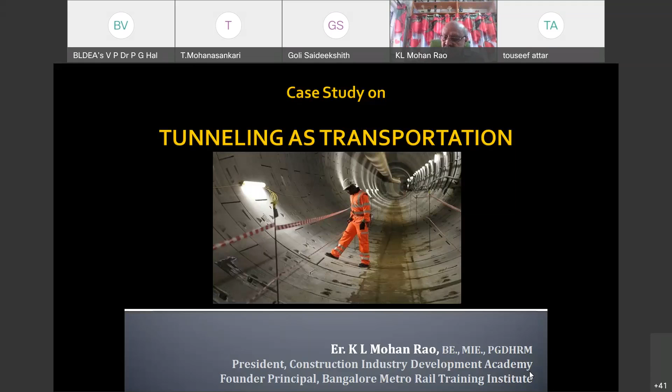So the whole system we are going to talk about: why tunneling, how tunneling is done, advantages and disadvantages, and also a case study of the Bangalore Metro Rail Corporation, which did its underground tunneling in the heaviest density of Bangalore, the old city of Bangalore, where all old structures are there. It shakes on its own, but we did the drilling about 60 feet below the city market and Chickpet area, and we faced a lot of challenges. So this is how we will be covering this area.

So what is tunnel? Tunnel is an underground passage used for transportation. It could be used for carrying freights and passengers, water, sewage, etc. Tunnels are more economical than the open cut beyond certain depths. Open cut means we are opening it up. Calcutta Metro did the open cut system, and it had terrible problems because in a very high density area they had to cut it open, and there were so many other problems like sewage, telephone line and water line, everything to be corrected. It took them 10 years and above.

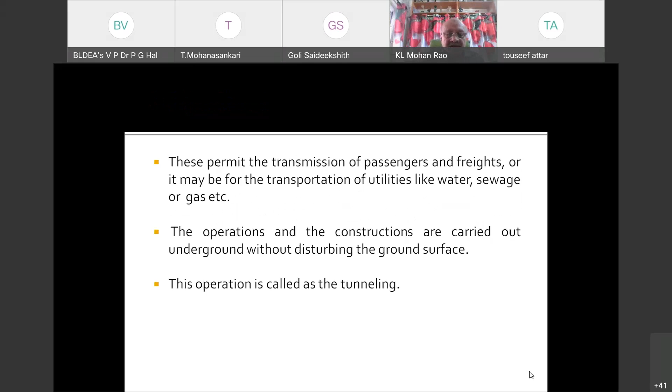So tunnels avoid disturbing and interfering with the surface life and the traffic during constructions. They permit the transmission of passengers, freight, and it may be a transportation of utilities like water, sewage, and gas. The operation and the constructions are carried out underground without disturbing the ground surface. That is why it is called as tunneling. Tunnels are underground construction used for transportation. The features, advantages, disadvantages, and methods of tunneling have been discussed in this presentation.

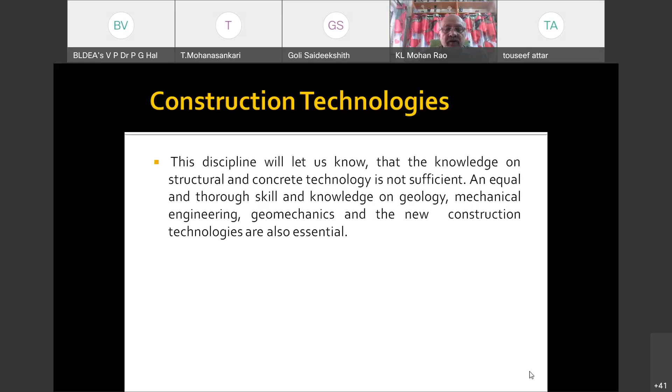The tunnel engineering is one of the most interesting disciplines in engineering. The work is complex and difficult throughout its course, even though it is interesting. Tunnel is defined as an underground passage that can be used for transportation purpose. This discipline will let us know that knowledge of structural and concrete engineering is not enough, and thorough knowledge of geology, mechanical engineering, geomechanics, and new construction technologies is also essential. So those people who are thinking civil engineering is only concreting, no, you have to have the additional knowledge about the other systems also.

The two main factors that help in the efficient route of tunnel are the alignment restraints and the environment consideration. The underground, as we know, is heterogeneous in nature. A proper inspection of the nature of soil, rock, and water table level, and all alignment restraints have to be made before fixing the route. So they have to make a real survey of it and see. Most of the time, the survey is done along the big roads of the place. The site chosen for tunneling is such that no inconvenience and difficulty is caused to the environment in the area, including those people who are living in that area.

Tunnel in loose rock and soft soil is liable to disintegrate, and therefore a lining is provided to strengthen the sides and the roof so that it prevents collapsing. So as the tunneling goes on, the TBM, that is the tunnel boring machine, will go on laying the lining. That means as soon as it digs about 3 meters, immediately from behind, we are bringing in the already made segments, and they are placed so that there is no collapse or water leakage inside the tunnel.

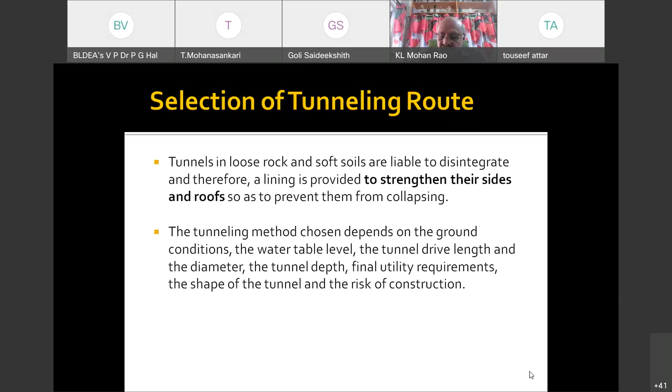The tunnel method chosen depends on the ground condition, the water level, the tunnel drive length and the diameter, the tunnel depth, final utility requirement, the shape of the tunnel, and the risk of construction. Surface and air interference is restricted for tunnels. Provision for tunnel is easy gradient, which helps in reducing the cost of hauling. So if you are doing open cut, you will be cutting and you will be creating a lot of muck, and it has to be taken out and dumped somewhere else.

For the transportation of public utilities, tunnel methods have a remarkable advantage compared to the bridge. The danger of open cut to the nearby structure is solved by tunneling systems. When we are cutting it, you must have seen on the roads, these other methods are being used.

We are removing the muck, and then when we are removing, sometimes the neighboring structures will also get damaged, and a lot of precautions for that have to be taken.

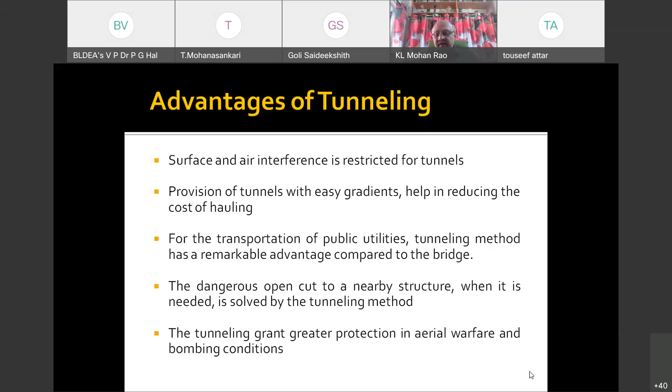Tunnels grant greater protection in aerial warfare and bombing conditions. You remember the Iraq war, when these people were just going inside the tunnels and staying there. Even if the Americans were bombarding them, everything was up there, because these people were nearly 60 to 100 feet below the ground and they were well protected.

The tunneling method has certain disadvantages, which are due to the complexity and difficulty. Some of them: the initial investment cost for commencing the tunnel is high compared to the open cut method. Initial investment, because we have to go down, and the machinery has to be brought in. In Bangalore Metro, we had imported machines from Japan. We had brought it from Korea. We had brought it from China.

Only a highly skilled and experienced design and engineering team will work best in these operations. In Bangalore, those people who were operating the TBM were not allowing our engineers into the cabin where these systems were going on, because they felt that Indians can learn it very fast and may replace them. So it is a very difficult situation when we have to coordinate with these Chinese. They were very difficult. They never allowed us to go inside to see what is happening.

And they are very well experienced. Today this is an opportunity for all the young engineers who are coming out in the future to think of tunneling as their alternative, and it is a highly paid job. So if you can start concentrating on how to get into that field, I think it is better now. Those who are in the third and fourth year, please concentrate on this line as an alternative source.

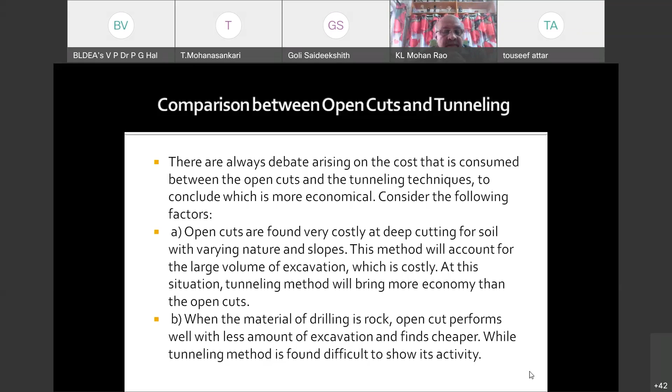When the material of drilling is rock, open cut performs well with less excavation and is found cheaper. So if you have a very big rock there and you are cutting it off, the open cut method is cheaper, while the tunneling method is found difficult.

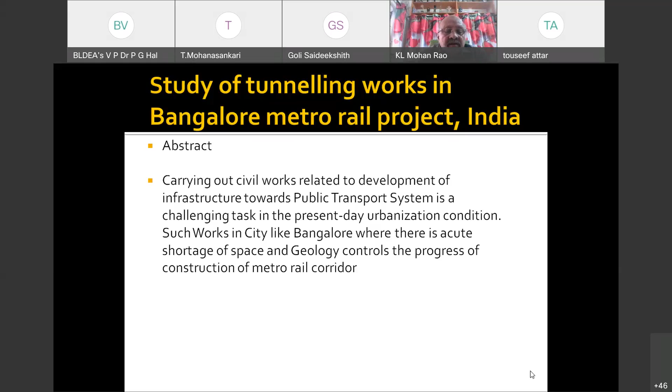So, what we have done in Bangalore Metro, I'm just giving you a case study. Carrying out civil works related to the development of infrastructure for the public transport system is a challenging task in present-day urbanization conditions, such as work in the city of Bangalore, where there is an acute shortage of space and geology controls the progress of construction of the metro rail corridor.

BMRC had taken responsibility for implementing the Bangalore Metro Rail project and faced several difficulties in implementing the first phase of the project. Bangalore, as you know, is a plateau, and the strata is not a continuous one. And we faced a lot of problems. One such challenge was construction of the tunnel and underground stations. For an underground station, we have to really go deep, nearly about 60 or 80 feet.

Tunneling in mixed strata below the major roads, and old buildings influenced the process. The place where we had to go underground was the Chickpet area and the market area, where old constructions are there.

Many old structures are there. People are residing there for more than 150 years. Maybe the buildings are also as old as that. And the other thing was there was no planning at all. One fellow built next to the other; I think other buildings are supporting these buildings. Because of the support from all three sides, these buildings have survived all these things.

So, one such challenge is construction of tunnels and underground stations. The tunnel is in mixed strata below the major roads, and the old buildings are influenced under the process. When we were tunneling in Chickpet and the market area, many times we had to evacuate people from the place, because sensors were put in all these old buildings to monitor when the rotation of the TBM was done.

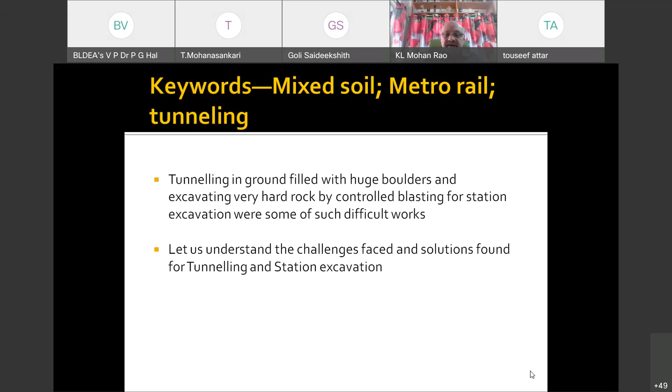Many a time, in spite of all the safety precautions, the rocks used to come and fall into the Central College. So this is the challenge when we are blasting for excavation. Let us understand the challenges faced and the solutions found in tunneling and station excavation.

In modern India, a number of tunnels were constructed in the 750 kilometer long Konkan Railway, which was constructed between 1990 and 1998. Konkan Railway has 93 tunnels. All of them were constructed by conventional methods except one tunnel in Honavar, Uttara Kannada district, Karnataka state, which was constructed using an open shield. That means it was ripped open, and things were done there.

Future. Now, in future railways, tunneling is happening. It's a new thing. A Dubai to Mumbai underwater tunnel train, covering a distance of 2,000 kilometers in 3 to 4 hours, also for oil and water transportation. It's in the news. So you have lots of opportunity, because the whole world is now talking about tunnels under the sea.

Mumbai to Ahmedabad is 508 kilometers, and an underwater tunnel of 21 kilometers is planned. Financial assistance is coming from Japan, and the work is in progress. And you will get the Kolkata underwater train for a distance of 17 kilometers at a depth of 30 meters.

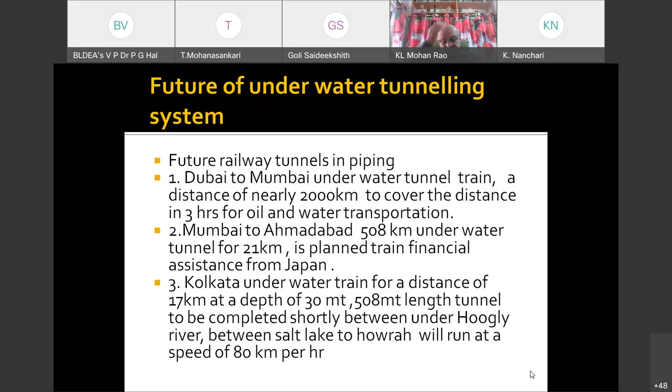A 508 meter length tunnel under the Hooghly River will be completed shortly, from Salt Lake to Howrah. This will run at a speed of 80 kilometers per hour. So that will be the first underwater train, in Kolkata. So you don't have to visit foreign countries to see marine life; you can see the whole system there.

Open shield refers to the type of tunnel boring machine, TBM as it is called, with which the cutting face of the shield is open, allowing direct access to the soil surface. So tunnel boring machines are put in an open shield. It is cut for nearly about 100 meters, and then this machine is put inside, and the tunnel boring machine is used for open shield methods.

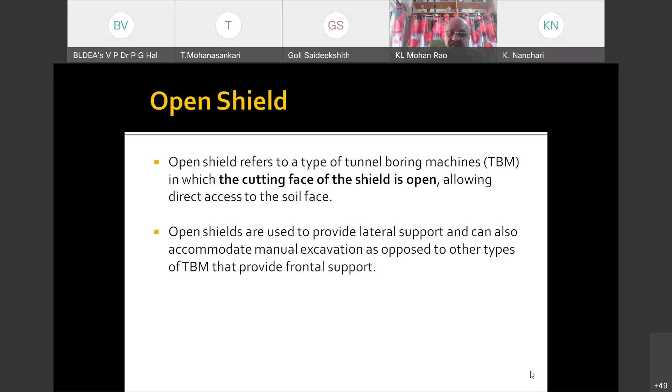Open shields are used to provide lateral support and can also accommodate manual excavation, as opposed to other types of TBM which provide frontal support. So the TBM is lowered into the place where tunneling has to be done, and then it is supported from all round, and it also has to be pushed with frontal support.

So this is the TBM, the tunnel boring machine. You can see it is 300 meters. It's a complete factory inside the tunnel. 300 meters, and so many people working at different stages.

The first thing here you can see is a cutter. Inside, this is a place where all the engineers are sitting, and then this is a place where the surface which is ground is taken off, all the excavation is taken off and then pushed outside the tunnel, which is far away. So this is the TBM, 300 meters long and maybe about 30 meters in diameter.

Tunnel boring machines were first used extensively in India by Delhi Metro Phase 1, subsequently Bangalore Metro and many other metros, as well as in other works related to irrigation, hydropower, disposal, sanitary and drinking water.

Tunneling is being used extensively now. Tunnel boring machine is a very safe tunneling method, which has brought drastic improvement in tunneling works. Earlier, machines were of open type wherein shields were used only to support against soil collapse.

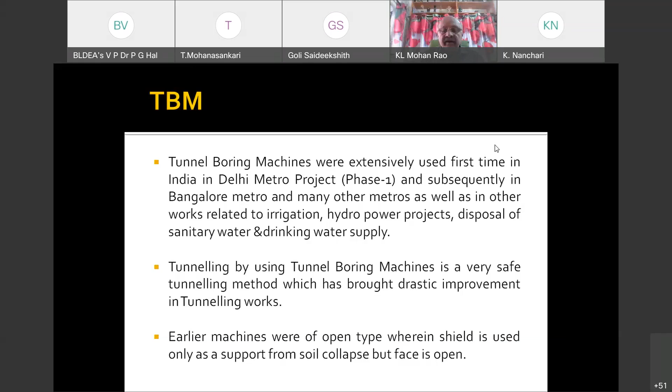A tunneling shield is a protective structure used during the excavation of large man-made tunnels. So you have seen the figure, we have shown you what it is. When excavating through ground that is soft, liquid, or otherwise unstable, there is a potential health and safety hazard for the workers and the project itself.

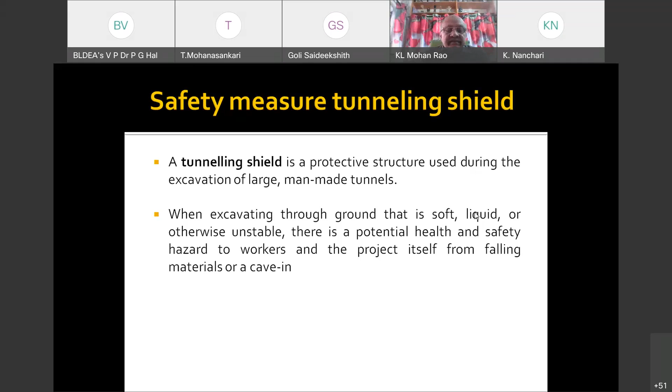This protects from falling materials and caving in. So I have explained to you why this shaft is lined up. Excavation in this type takes place with the help of conventional machines like excavators, so excavators will be used and the material will be removed.

Pressure on the face of the tunnel cannot be increased in open type of machine. If you are using an open type of machine and then if you increase the pressure of the excavator, there is a chance of damaging the structures which are along the tunnel.

In rocky strata which does not need lining as support, if it is a complete rocky mountain, if we are going to open up, then we do not need any support. You can remember that in Jammu we had opened a tunnel about, I'm not very sure, about 8 to 10 kilometers, which was opened by the road tunneling people, and it is connecting Jammu directly to Leh Ladakh, and it has saved a lot of time. It was completely done under the hillock, and it is completely rock only.

So in many places we do not need any shield at all. That is how no support was required there. But drilling was a big challenge, and the open type machine called a cutter head is used, such machines will not have a shield.

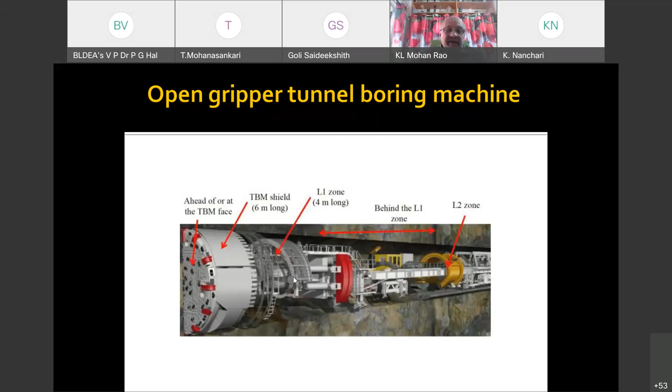And then there is a place, the L1 zone. So all the muck which is collected gets collected here, and then from this it comes here, and then it gets transported through, I think, a conveyor belt. It gets transported outside, and also the lining for the surface is already readily kept ready there, and it gets fixed up automatically. There is a very big slide I'll be showing where the whole operation is explained.

Earth pressure balancing machine. Earth pressure balance is a mechanized tunneling method in which the excavated material is used to support the tunnel face. It is plasticized using foam, slurry, and other additives to make it transportable and impermeable. So when this material is used, sometimes we use it for plasticizing, and we add some more additives, and then it can be used for the lining also.

Slurry machine. Thin slurry is a thin, sloppy, wet mixture of liquid and solid components. Sludge and slurry is the byproduct of industrial refining and wastewater treatment processes, depending on the industry.

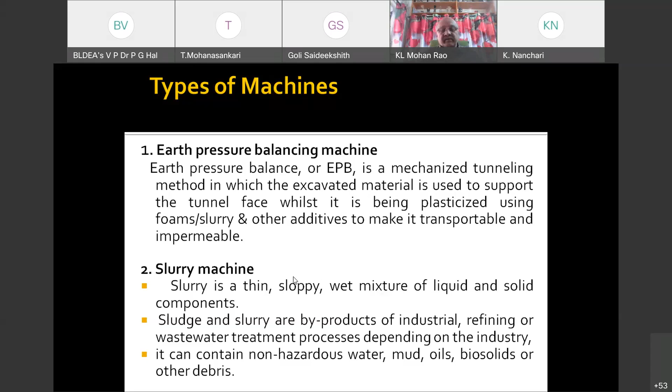It contains non-hazardous water, mud, oil, biosolid and other debris. So this slurry, what is removed, it is taken to the tunnel.

The place where the tunnel starts, the material is recycled. The rock debris from the tunneling is usable for other things, most commonly as concrete aggregate or as base for the road.

So in Bangalore near Sangam, we had a recycling system there. Crushers were there where all the rocky material which came out by the conveyors were brought to the crushers. It was sorted out, crushed, and used for concreting.

Then big rocks were used for laying of roads. Trucks used to be waiting, and then it was taken away. So no material was wasted.

A lot of planning was done so that the material is not dumped at any place making another mountain. It was shifted off and used as concrete aggregate, and also for road filling and road building.

Crushers and screeners normally used in quarries are stationed at the tunnel site for the purpose of crushing and screening the rock debris for further use. Excavated material is transported from the tunnel face to outside the shaft as waste slurry.

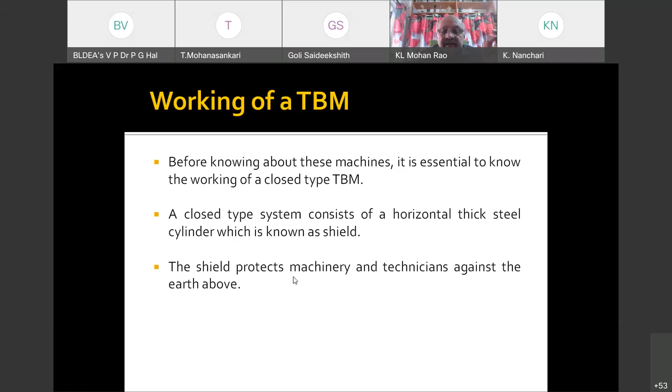The cutter head, where the cutting tools are placed, will be at one end of the shield towards the tunnel face. So you had seen the cutters there. The cutter head is there, lots of cutters are put there, and it goes where it faces the tunnel face.

Cutter head is a heavy set part of the TBM. Cutting disc and scrapers are placed in the cutter head. So you have got the cutting tool, and also there is a scraper.

If there is loose soil, the scraper will go on scraping it. At the same time, the cutting tool will go on drilling and removing all the rocks there.

Design of cutter head is mainly based on the type of earth to be excavated by the machine. So when we are doing the soil investigation, we know what type of soil we will be encountering, and based on that, the design of the cutter head is done.

A machine to work in soil will not have cutter discs, it will have only scrapers. So if it is loose soil, it is only soil there.

In Bangalore, the plateau, we had lots of mixture. In one strata, when digging, we have got sand and silt. We have also got a mixture of sand and rock, and then we had hard rock. So like this, it was not predicted.

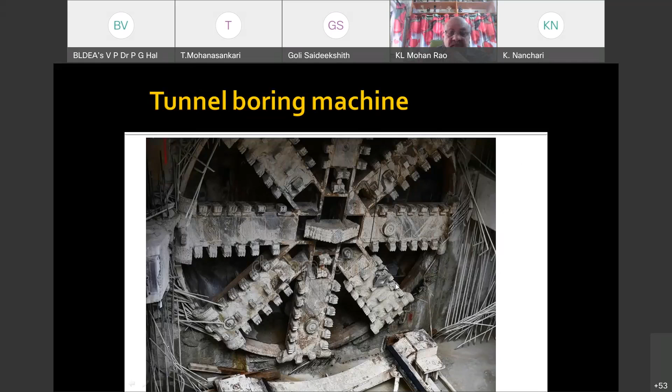So lots of challenges will come in the tunnel boring machine, which will be illustrated now. A machine to work in rocky strata will have cutter discs mounted on the cutter head. There will be a suitable number of drive motors for rotating the cutter head, because it requires lots of pressure.

So there will be a segment erector which is used to place the tunnel lining. In Bangalore Metro, we had about 6 segments with a small T there. These 6 segments are placed inside the machine, and as soon as it starts drilling, the segments are pushed inside, and then erected with the machine's help, and whatever gap is between the segment and the shield, I don't know if you are imagining it.

So you are putting a pipe inside, a big pipe going inside, but the pipe is made into 6 different segments, and then it is assembled by the TBM itself, and it has got a T joint, which acts just like a dowel, it goes and sits there and tightly packs into the diameter of the shaft or tunnel. The difference, whatever gap is there, is filled with slurry by this machine itself, so that it becomes solid and no water seepage or material comes out from the shield.

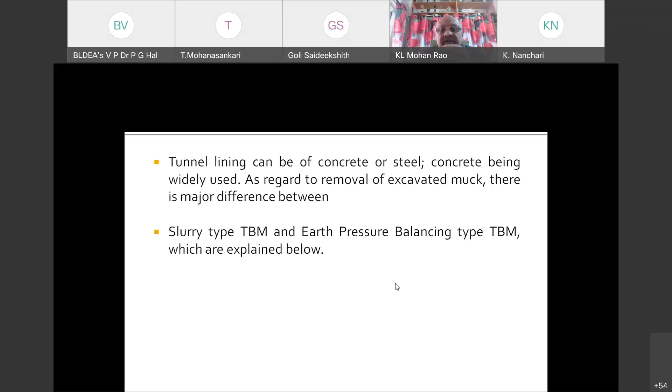As I told you, concrete precast material is used. In Peenya, we had a very big casting yard. Now we are doing a lot of work along Mysore Road and the other periphery road connecting South Bangalore to Bayapanahalli, making a complete circle, and lots of concrete blocks are being made at different sites.

So slurry type of boring machine is a machine where excavation takes place in presence of a liquid. A liquid is poured and pumped inside the tunnel, and the tunnel mud has a specific gravity of 1.12 or 1.2. When the liquid is pushed inside, it can be made using bentonite clay or polymers. The tunnel mud is pumped through the pipe to the excavation chamber.

So we are putting a lot of pressure, and this bentonite clay or polymer is pumped in front of the cutter, and whatever muck is collected while drilling is taken away by conveyor belts. It is taken outside and filtered, then recycled back inside the tunneling process.

Excavation by the TBM happens due to rotation of the cutter's head and forward movement of the shield, helped by thrust jacks. So the rotation is happening by the cutters, and behind there is a thrust mechanism. A very big thrust is given by the thrust jacks, creating pressure, and that is how the cutting goes on.

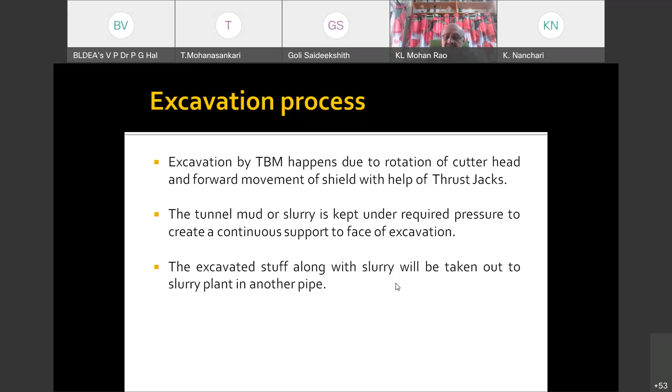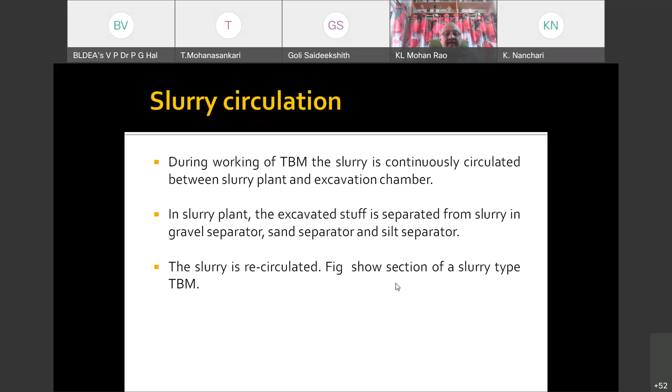The excavated stuff along with the slurry is taken out to the slurry plant in another pipe. During working of the TBM, the slurry is continuously circulated between the slurry plant and excavation chamber. At the slurry plant, the excavated stuff is separated from the slurry in the gravel separator, sand separator, and silt separator. As told before, it goes by conveyor to the slurry plant, gets separated, is reused somewhere else, and the slurry comes back recirculated. The slurry plant is shown here.

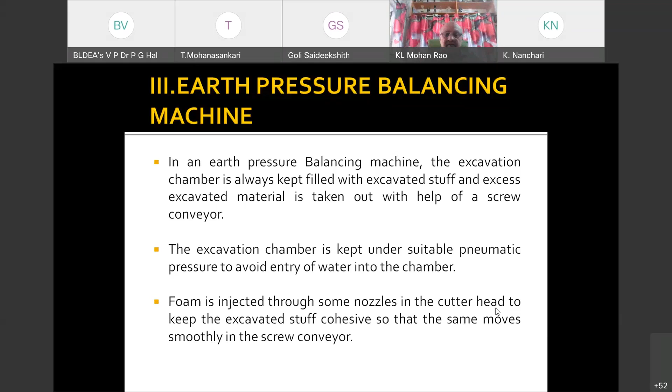Foam is injected through some nozzles in the cutter head to keep the excavated stuff cohesive so that it moves smoothly in the screw conveyor. So whatever excavation is being done, whatever cutting is being done, a foam will be given so that it is uniform and stuck together, and when the conveyor screw moves, it moves behind. So this is the conveyor screw.

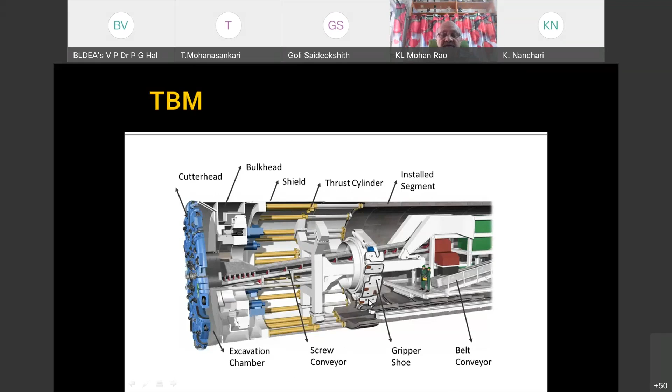So installed segment. This is already installed. You see, as I told you, the segments are brought in 6 different pieces, and they have been installed here. So as the drilling goes on, installation goes on from behind. So excavation chamber is this, screw conveyor is this one, gripper shoes. All the shoes we were talking about, the gripper shoes, are here. Then the belt conveyor which takes the muck behind.

Two types of forces are applied in TBM for excavation. One is to rotate the cutter head, that is the torque, and the other is to push the shield, that is the thrust. A combination of these two forces is used for excavation in rock and soil. Face is kept under pressure. That means beyond the cutter, it has to be kept under pressure to keep the water away from entering the machine. So if there is a pressure in front of the cutter, this water will not flow inside the machine, the chamber where the operations are being done.

If there is a loss of water from the area near the tunnel alignment, water table in the vicinity will be affected, which will cause settlement. So we have to be very careful to see whether there are any tanks or any reservoirs where the tunnel is going, and if there is any leakage, we can have water coming inside the tunnel.

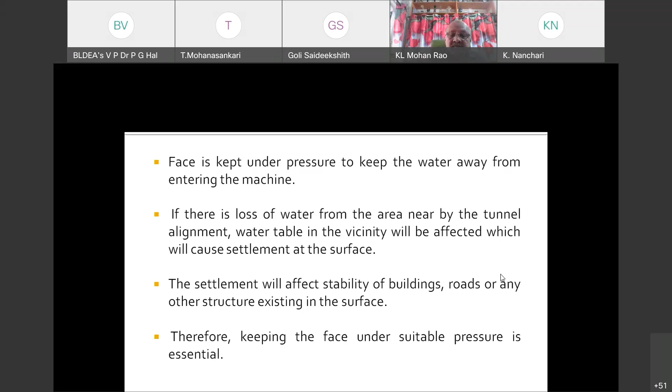If there is a loss of water from the area near the tunnel alignment, water table in the vicinity will be affected, which will cause settlement at the surface. As soon as the water comes out, caving in will start happening, and all the buildings around will be affected. The settlement will affect stability of the buildings, roads, and any other structures existing on the surface. So we have to make sure that the pressure inside the tunnel and outside the tunnel is balanced. Therefore, keeping the face under suitable pressure is very essential.

While excavating the rock, revolution of the cutter head is kept higher. So if there is rock there, the rotation of the cutter will be 4.5 revolutions per minute, and thrust force is kept low. We cannot push by thrust, because there will be rock there. If there is rock, we have to go very slowly. In Bangalore, we did not use this 4.5. I think we were only using 2.5 to 3 revolutions per minute because of the buildings above us.

In case of excavating soil, revolution of the cutter head will be kept low and thrust will be kept high. So if it is only soil, the cutter head speed will be kept low and the thrust is more.

In case of a mixed strata, both the above guidance cannot be met. So we'll have to judge and see whether rock is there, soil is there. Based on the experience of this person, the speed is adjusted.

When the face is partially rock and partially soil, this guidance gets violated with respect to the rock or soil. It is difficult to cut the rock with a lower revolution, and at the same time, soil gets excavated quickly, and the face needs to stand on its own for a longer period, which may cause a collapse of the face.

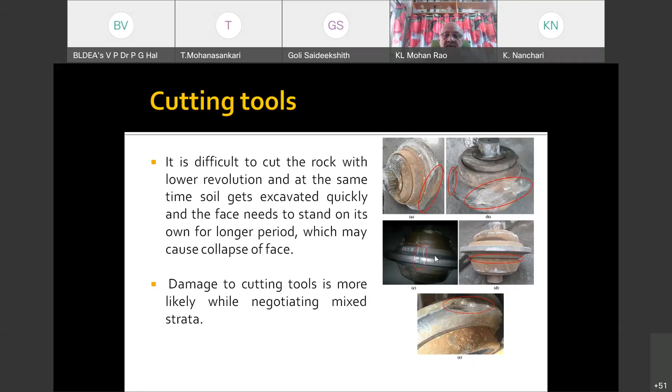Careful movement of the machine, close observation of various parameters like face pressure, advance rate, theoretical and actual excavation quantity, etc., is very essential while mixed face is encountered. So, removing only soil is not so difficult. Removing a rock is not very difficult, but when there is a mix, then a lot of tool damage and interventions will take place.

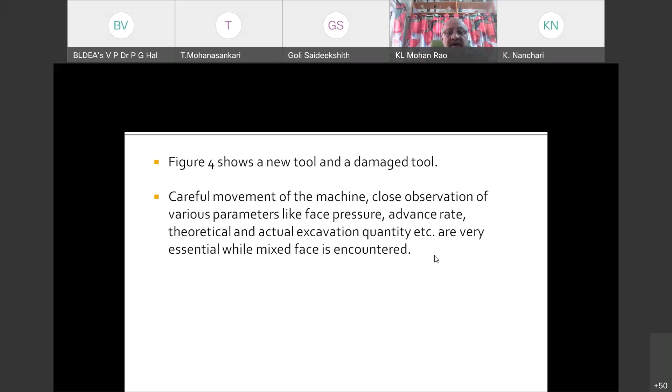And in Bangalore, it used to happen many times, and sometimes 3 or 4 days were lost just to remove the cutters, replace them, and again do the job.

In case a boulder having more diameter than the TBM has to be negotiated, the challenge faced by the tunneling team gets tough. We may have very huge rock diameters, which we would not have come across during the soil investigation. Sometimes it gets hidden also, and if we have to negotiate a big diameter rock, it becomes a very tough challenge.

Water moves along the surface of the boulder during increase or decrease of the surrounding pressure. So with a very big boulder being tapped, water from the top may also come inside into the tunnel. Fine particles along the surface of the boulders are subjected to the moving water repeatedly and get washed away. So a lot of fine particles will be settling on the surface of the cutting machine, so we have to wash it off with water.

Mainly coarse-grained particles remain in the area, causing loss of friction between the soil and the boulder. The grains will start rotating on their own. Therefore, the boulder tends to rotate. Sometimes, because of these particles, the boulder itself will start rotating with the cutter. And when this happens, we have to adopt some other methods to arrest the boulder.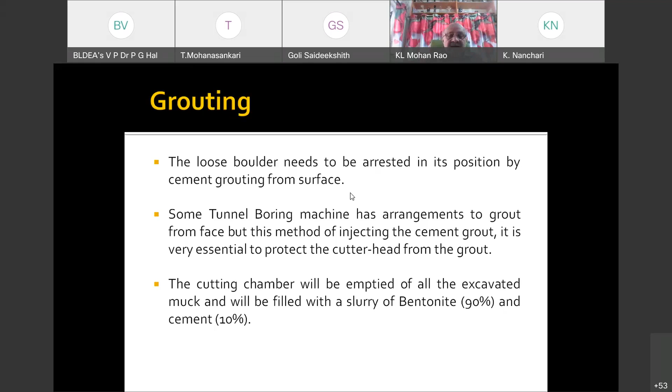The machine can restart excavation after 24 to 48 hours, as the injected grout needs to set. So whenever we are grouting the rock in front of the machine, we have to put in this bentonite and grouting materials, and we have to wait 24 to 48 hours for it to set, so that the rock does not rotate and the cutting process can be continued.

Several such situations were met while tunneling in the first phase of the Bangalore Metro project, where repeated grouting was carried out to negotiate such areas of boulders.

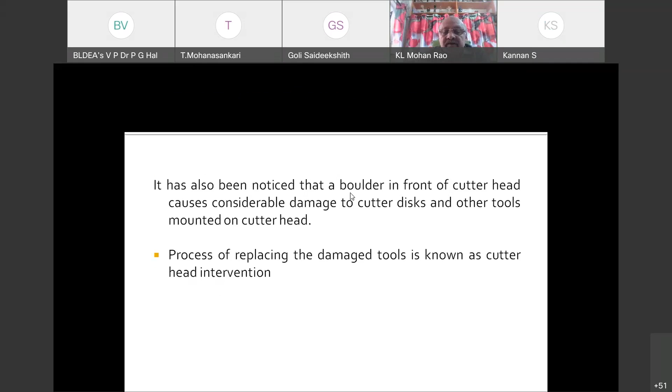It is also noticed that the boulder in front of the cutter head causes considerable damage to the cutters and other tools mounted on the cutter head. The process of replacing a damaged tool is called cutter head intervention. In this process, the technician enters the cutter head portion under compressed air.

He goes there under a lot of pressure, compressed air, and he replaces the broken parts or does any other alignments to be done. When the tunnel alignment is below the water table, working under pressure becomes essential to prevent water. So we have to create enough pressure in front of the cutting head so that the water from the top, the sewage line or anything, does not seep into the tunnel.

If there is an air loss happening due to disturbance of the boulder, pressure cannot be maintained. When the boulder starts moving and there is a disturbance because of the movement, the pressure cannot be maintained. In this condition, filling of weak mixture into the chamber has to be taken up immediately, and intervention done after completing cement grouting in this area. So a weak grouting material is injected inside to make sure that the boulder does not move.

Consumption of grout depends on the porosity of the ground in the area. As the shape of the boulder cannot be assessed correctly, the grouting has to be carried out almost with a trial and error method. So we do not know what is the size, what is the shape. So with the trial and error method, this person sitting inside the chamber sees it and the grouting is carried out.

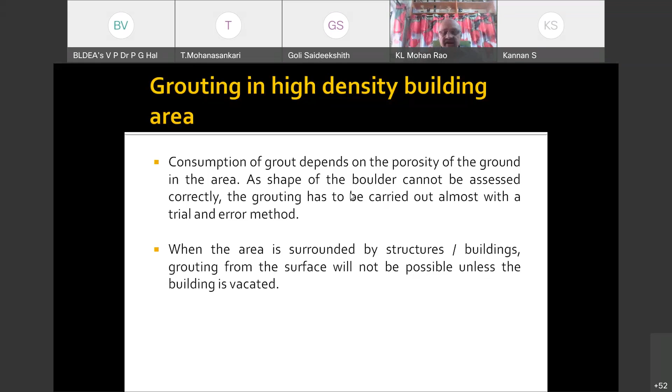When the area is surrounded by structures and buildings, grouting from the surface will not be possible unless buildings are evacuated. So we cannot do the grouting from the surface. And if the buildings are old, they have to be evacuated and this process has to be carried out.

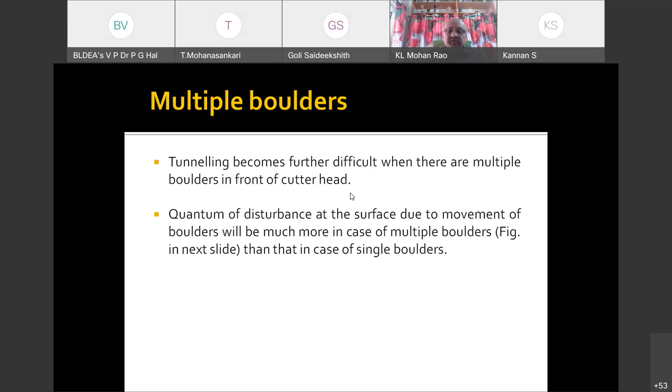Tunneling becomes very difficult when there are multiple boulders in front of the cutter head. If it is a solid rock, it is very easy to do the drilling part. If there are multiple rocks, it becomes very difficult for the cutter head. So the quantum of disturbance at the surface due to the movement of boulders will be much more in case of multiple boulders. A single boulder can be cut because it is stabilized and the cutting surface can be used very easily. But if there are multiple boulders, they start moving along and it becomes very difficult.

When we are working, small particles will start coming up, and it starts rotating, and the drilling operation becomes very difficult. So this is what had happened near Vidhan Soudha. Nearly 3 to 4 months was spent to open it up, remove it, and redo the job. Damage to cutting tools is also more. Arresting the boulders from further movement is also more difficult than in case of a single boulder.

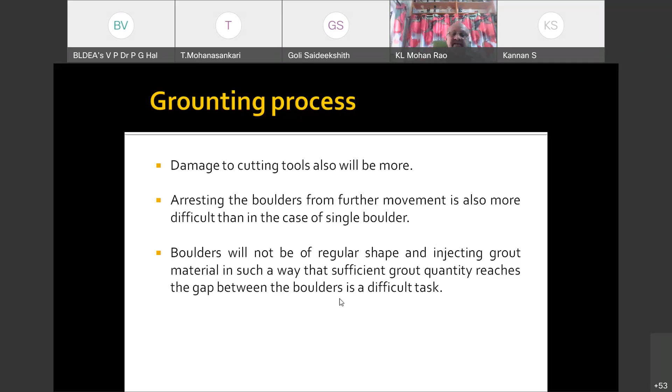Boulders will not be of a regular shape, and injecting grout material in such a way that sufficient grout quantity reaches the gap between the boulders is a difficult task. Since we cannot judge the shape and size of the boulder, the grouting is very difficult. By experience only, this man goes there, injects the grouting material, and goes ahead. Further, there is no method to assess the correct position and size of the boulders.

Grouting has to be done only based on observation of the tunnel face from the cutting chamber, wherein boulders and other types of soil surrounding the boulder can be seen. So by experience, this man goes and sees what is the size, what is the soil, and then the grouting is done based on his experience, in front of the cutting edge.

Observe the impressions of the cutting disc on the tunnel in the hard rock. In front of Vidhan Soudha, we had a hard rock, and you can see the cutting making a mark here. So if this is a hard rock, cutting is easy.

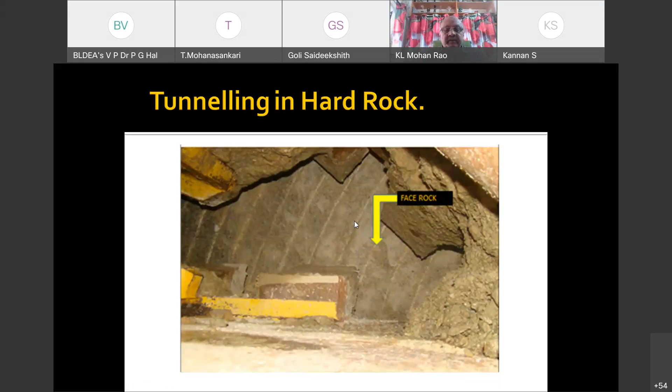If it is a mixed rock, mixed surface, it becomes difficult. So cutting in this where it is fixed: whenever you are drilling some material, if it is fixed, you are putting it into a vise and then drilling. If there is no vise and you start drilling, the whole object will also start rotating, and you may get damaged also. So that is the principle in which this hard rock is also being done.

So boulders faced during tunnel are granite rock, and are very hard as a sheet rock. Compressive strength of the boulder rock encountered is as high as 300 MPa. Cutting a granite boulder with a strength of 300 MPa is more difficult than cutting full face rock.

Rotation movement of the boulder causes a lot of vibration in the surrounding soil mass, resulting in ground settlement and damage to the structures above. So if you do a very fast rotation, or if there is a very hard surface in front of the cutter, due to which vibration is caused, the surrounding buildings also will get affected, and there'll be settlement or damage to the structure.

In Chickpet, we had done lots of such things. We had put sensors into all the old buildings, and if the rotation was causing vibration, it was sensed, and then those buildings were evacuated, restructured, rebuilt, and then further cutting was done. So that was a very big challenge during the Chickpet area tunneling.

Movement of the boulder may cause pressure loss on the face of the tunnel, especially in case of EPB type of machine. Slurry may leak to the surface in case of slurry machine. Once the boulder becomes loose, it is not safe to continue excavation. So that's why slurry has to be pumped in. We have to make sure that the boulder is fixed in place.

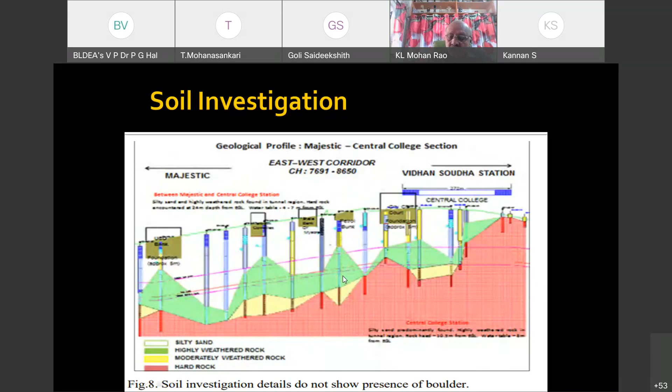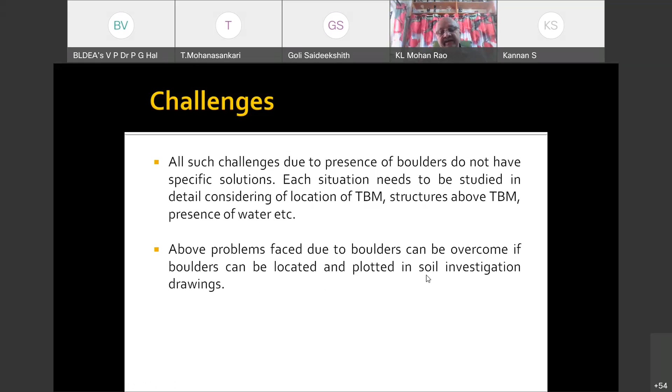All such challenges due to the presence of boulders do not have a specific solution. Each situation needs to be studied in detail considering the location of TBM, structure above TBM, and presence of water. Any problem faced due to the boulders can be overcome only if the boulders can be located and plotted in the soil investigation. If we know in advance, during the soil investigation, that there is a boulder like this situated at this place, we can do this work well in advance.

Soil investigation is carried out after finalizing the metro alignment. In the urban area, soil investigation itself is a difficult task. Usually metro alignment follows the road alignment. So wherever the big road is going, we follow the same alignment so that we can go along the road itself. Metro alignment deviates mainly because of the curvature of the road, and if it is very steep, we have to change the alignment above the road.

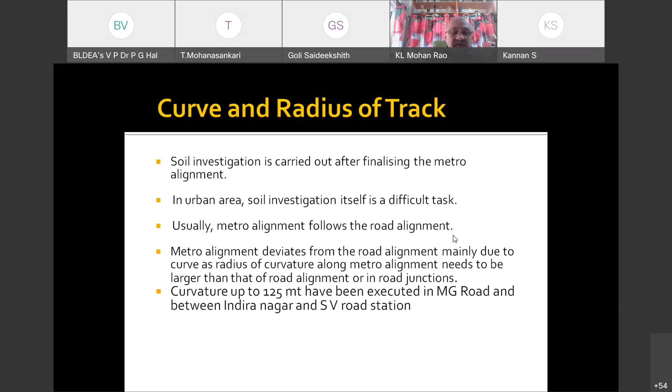Curvature is 125 meters in MG Road and Cubbon Park, Indiranagar, and SV Road. If you are traveling in that metro, you can see the whole train bending, and it is nearly 125 to 150 meters radius curvature. So that is how the whole system works. And because of such curvatures, the speed of the metro train, which is designed at 80 kilometers per hour, runs only at about 30 to 40 kilometers per hour, because of a lot of curves in this area.

So you can see this. This is in Indiranagar to Baiyappanahalli. Such curvatures are there. So because of that, the speed is reduced, and because of curvature, there will be a lot of vibration, and vibration will cause sound problems for the other things. So we have to take care of the sound also in these areas.

Soil investigation is carried out at every 50 meters and also sometimes at 25 meters. Even at close intervals, it is not able to map the boulders accurately. Also, soil investigation bores will be terminated. Not even a single boulder has been identified or recorded anywhere in the soil investigation of phase 1 of metro. So when we went drilling every 25 to 50 meters and did the soil investigation, we could not identify even one boulder, but the maximum number of boulders came in that area.

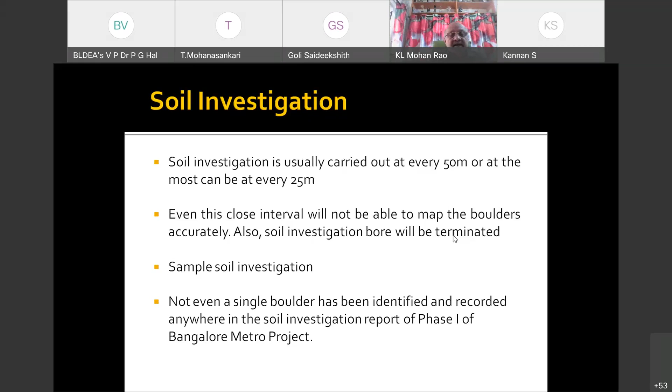It is possible to record the complete strata only when the bore is drilled to the depth of the proposed alignment, irrespective of the depth where the rock strata is met. So if we are planning about 60 meters, we have to go 60 meters, and the soil investigation has to happen till there. Even in such cases, boulders of size lesser than 25 meters will remain unidentified. So even when you are doing this, if a small boulder is there, we will not be able to identify it when the soil investigation is done.

A boulder of 3 to 4 meters diameter is good enough to pose all the difficulties mentioned above. So even a small boulder or a group of boulders coming in the line of excavation can create a lot of problems. So this is what we had shown in the previous slide.

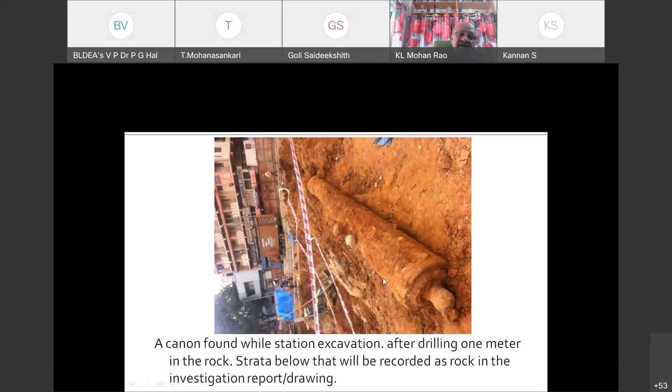And a cannon was found during station excavation after drilling 1 meter of rock, a strata which would be recorded as rock in the investigation. This cannon was found in City Market, and also near Vidhana Soudha we had found two such cannons. This cannot be recorded. You can see this varying diameter, and they could not identify that. But as soon as the tunneling started, they could feel it and they found this. And I think they had to open the ground and remove this.

There is an alternative method like ultrasound technique to record the size and depth of the boulder accurately. Precautionary measures like advanced grouting can be done 2 to 3 months in advance before tunneling work, so that the grout attains required strength before the area is subjected to tunneling. If this ultrasound technique is used, we can start grouting 2 or 3 months in advance, so that the strength of the grout is good and the tunnel can proceed without problems.

Even changing the tunnel alignment can be considered depending on the distance of the rock boulders from the nearby station. If advanced techniques are used, we can even change the alignment of the tunnel.

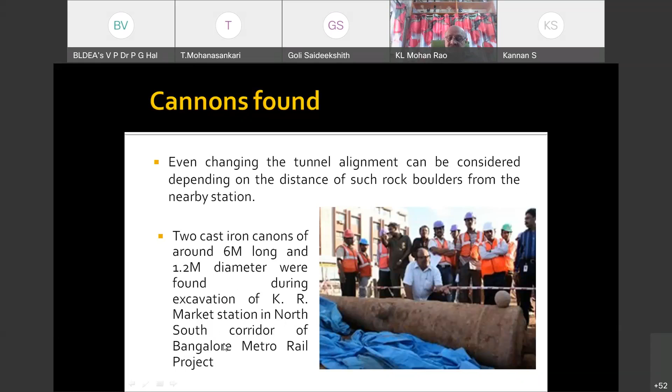Two more cast iron cannons, 6 meters long and 1.2 meters in diameter, were found during excavation in KR Market in the north-south corridor of the Bangalore Metro Rail project. If such materials are met during tunneling, there is no alternative other than making a rescue shaft to remove them. If such obstructions come along the tunneling line, we may have to open a shaft, and a person has to go down and remove this material from that area, then fill it up and proceed.

Near Majestic, our machine got stuck because of the mixture of boulders and other obstructions, and the machine could not move even an inch afterwards. We had to open a shaft on the ground. Then a tunnel was made to go down again across the line, dismantle the tunnel boring machine, remove it from there, and install another machine.

That's how we lost nearly 6 to 8 months for the whole process, with additional cost of making the shaft, removing the machinery, repairing and reinstalling it. It took nearly 6 to 8 months, and lakhs of rupees were spent on this correction.

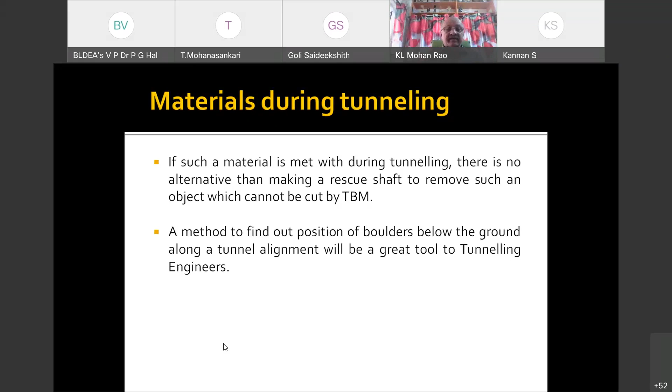Initially, a weak mix is injected from the machine itself to surround the cutter area so that the cement grout does not come directly in contact with the machine. We inject this weak mix so that the slurry will not come directly in front of the cutting head. Once this grout is set, usually in 8 to 10 hours, cement grouting surrounding the boulder can be done from the surface, after all precautions are taken. It takes about 8 to 10 hours for it to settle down.

These were the things that happened in BMRCL, and I'm thankful to BMRCL Authority for granting me permission to publish this paper. The reference for this is BMRCL Technical Reports Internal, and that is the number. Special thanks to Engineer Subranium Gudge, Chief Engineer of Underground Projects, who is now extensively involved in underground Metro projects.

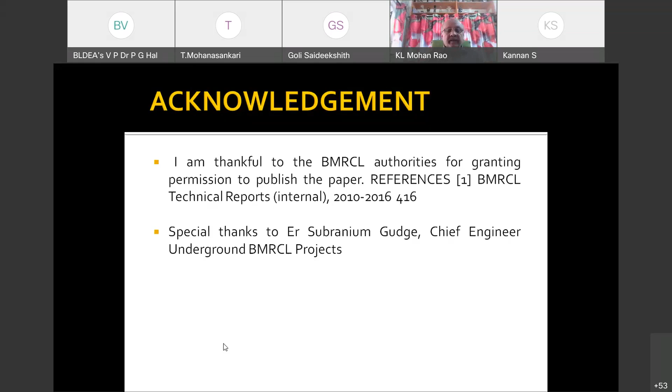I'll be showing you whatever I talked about, how this machine works. You will enjoy it, and I think whatever I've discussed will get related to the operations. Thank you for your patience and patient hearing. Once you see this, you will understand what I talked about. Thank you very much.

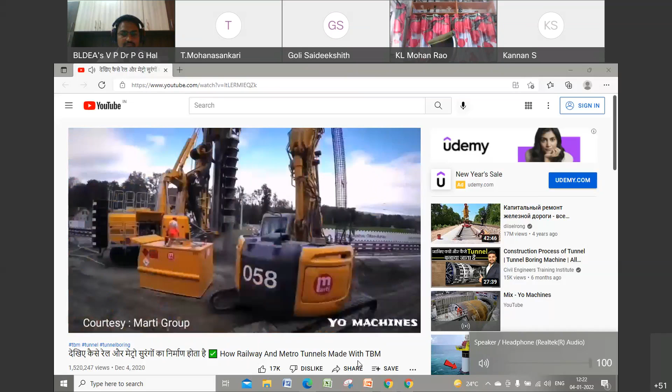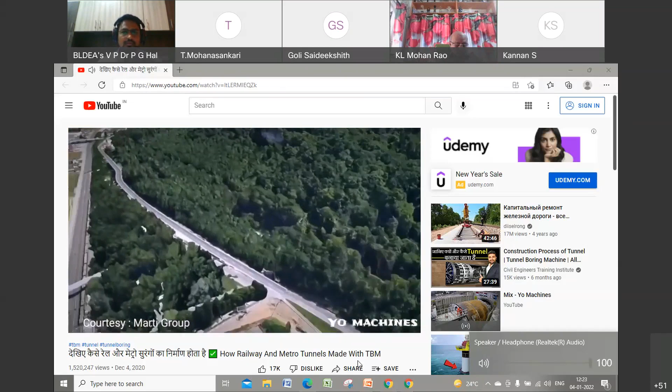इसके लिए बहुत ही आधुनिक तकनीक और सही प्लानिंग की आवश्यकता पड़ती है। 100 मीटर लंबे टीबीएम मशीन से सुरंग बनाने के लिए 300 मीटर लंबे और 150 मीटर चौड़ी जगह की आवश्यकता होती है, जहां पर टीबीएम की असेंबली की जाती है। बिजी सड़क के आसपास इस जगह को तैयार करने के लिए कई बार पेड़ों को काटना पड़ता है या फिर सड़क को ही पूरा का पूरा शिफ्ट करना पड़ जाता है।

रेलवे ट्रैक का कुछ हिस्सा सुरंग से बाहर और कुछ हिस्सा सुरंग के भीतर से होकर गुजरता है। सुरंग के शुरुआती हिस्से को बनाने के लिए कट एंड कवर तरीके का इस्तेमाल किया जाता है, जिसमें रेलवे सुरंग के एक हिस्से को बनाते समय जमीन पर जगह को साफ करके मशीनों और दूसरे इक्विपमेंट्स को सेट किया जाता है।

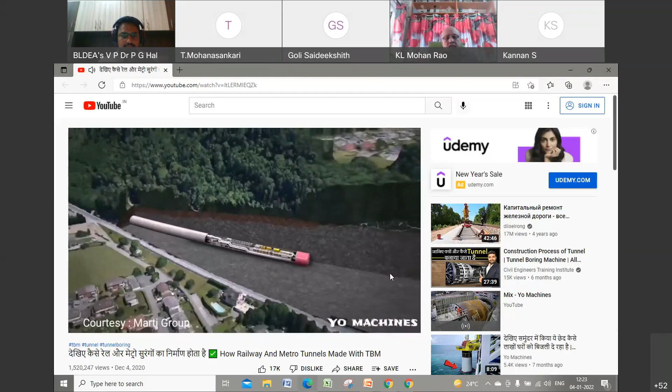जैसे जैसे टीबीएम आगे बढ़ती है, वैसे वैसे इन मशीनों को भी आगे बढ़ा दिया जाता है। सड़क और पहले से ही बनी रेलवे ट्रैक्स के बीच में इस काम को निपटाना होता है। जमीन और रोड की दीवार को सपोर्ट देने के लिए सैकड़ों स्टील के बोल्ट्स को मशीनों की सहायता से जमीन और दीवारों में फिट किया जाता है, जिससे सुरंग बनाते समय जमीन धंसने जैसी समस्याओं से छुटकारा पाया जा सकता है।

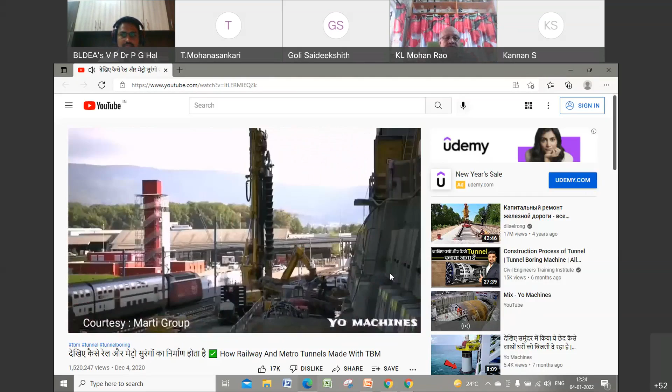इतने भारी भरकम मशीनों के साथ एक्टिव रेलवे ट्रैक के बिल्कुल नजदीक काम करना काफी जोखिम भरा हो सकता है, जिसके लिए बहुत अधिक सावधानी के साथ पूरे काम को निपटाना होता है। थोड़ी सी सावधानी हटी और दुर्घटना की संभावना बढ़ी। यही वो जगह है जहां से ट्रेन का ट्रैक सुरंग से होकर गुजरेगा।

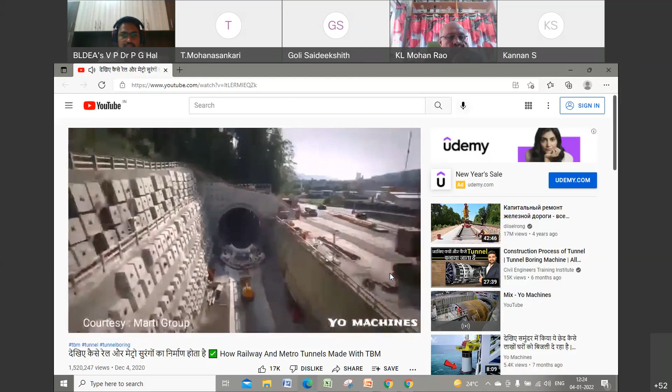टीबीएम मशीन के कार्य शुरू करने से पहले सुरंग के छोटे से हिस्से को खुदाई करके बनाया जाता है। सुरंग का शुरुआती हिस्सा तैयार हो गया है, जो लगभग 100 मीटर लंबा है, और साथ ही सुरंग के सामने वाला हिस्सा भी फ्री है। इसी जगह पर 100 मीटर लंबी टीबीएम मशीन की असेंबली का काम किया जाएगा।

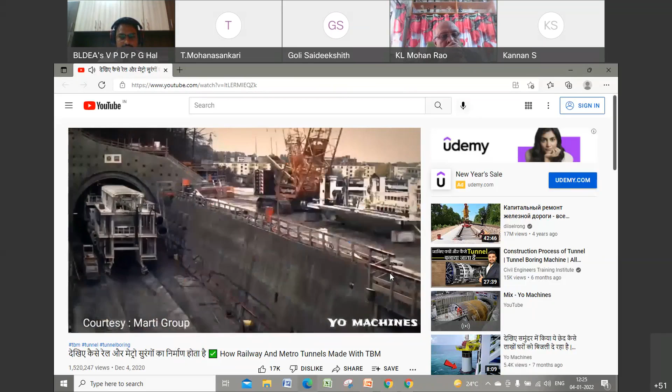इतनी बड़ी टीबीएम मशीन को ट्रांसपोर्ट करके किसी एक जगह लाना बहुत ही असंभव कार्य है। इसलिए टीबीएम मशीन के विभिन्न हिस्सों को अलग अलग ट्रांसपोर्ट करके यहाँ पहुंचाया जाता है और फिर मशीन के हिस्सों को क्रेन्स की मदद से आपस में जोड़कर पूरी टीबीएम मशीन को तैयार किया जाता है। देखिए, टीबीएम मशीन के सामने लगने वाले बड़े से कटर को भी जोड़ दिया गया है।

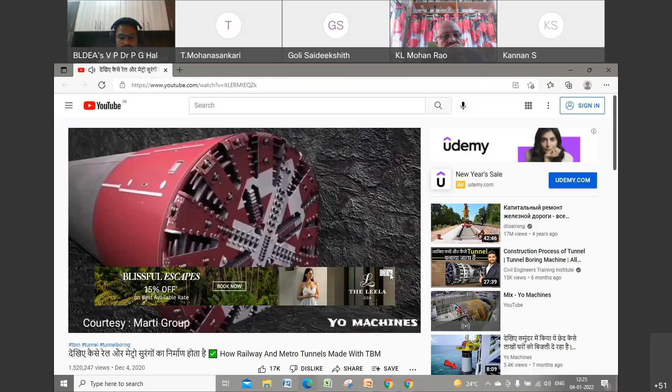टीबीएम की असेंबली पूरी होने पर मशीन सुरंग बनाने का अपना काम शुरू कर देती है। टीबीएम मशीन जमीन को काटते हुए आगे चलती है। मिट्टी और पत्थर के हिस्से घूमते हुए टीबीएम के बीच के हिस्से में गिरती है, जहां पर कन्वेयर बेल्ट लगी हुई है, जो इन वेस्ट मटेरियल्स को खींचकर टीबीएम मशीन के पिछले हिस्से की तरफ लेकर जाती है।

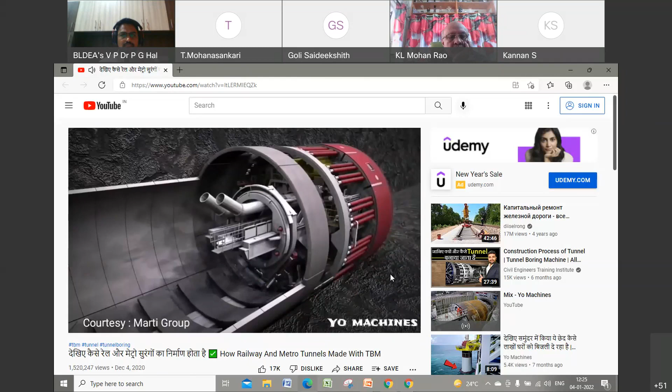टीबीएम मशीन के अंदर लगे 48 हाइड्रोलिक्स जैक्स प्रेशर डालकर टीबीएम मशीन को आगे कर देते हैं। टीबीएम मशीन की सबसे अच्छी बात यह है कि सुरंग बनाने के साथ साथ ये मशीन सुरंग की दीवारों पर कंक्रीट के हिस्सों को भी फिट कर देती है। कंक्रीट के इन हिस्सों को फैक्ट्री में सीमेंट, स्टील और पत्थर के रोडों से तैयार किया जाता है।

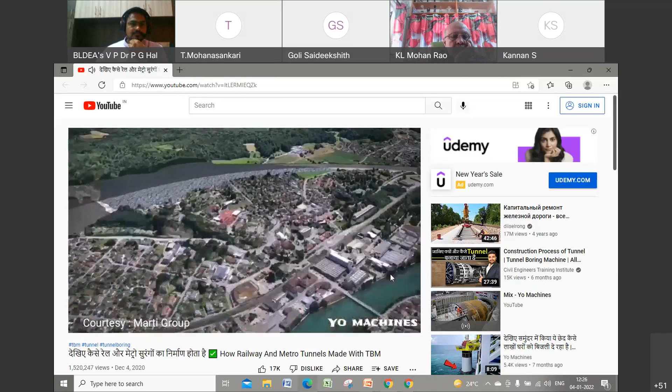कंक्रीट की प्लेटों के निर्माण से लेकर इन्हें ट्रांसपोर्ट करने के काम में भी आधुनिक मशीनों का प्रयोग किया जाता है। कंक्रीट के इन हिस्सों को ट्रांसपोर्ट गाड़ी का इस्तेमाल करके सुरंग के अंदर भेज दिया जाता है। सुरंग बनाते समय बहुत अधिक मात्रा में मिट्टी, पत्थर के टुकड़े, रेत आदि निकलते हैं।

इस वेस्ट को भी इस्तेमाल कर लिया जाता है, जिसके लिए एक प्रोसेसिंग यूनिट को सुरंग बनाने वाली साइट के पास ही इंस्टॉल कर लिया गया है। ये एक मॉड्यूलर सिस्टम है और इसे अलग-अलग साइट्स पर जरूरत के अनुसार असेंबल और इंस्टॉल किया जा सकता है। प्रोसेसिंग यूनिट सुरंग से निकलने वाले वेस्ट को क्रश करके छोटे-छोटे हिस्सों में बदल देती है।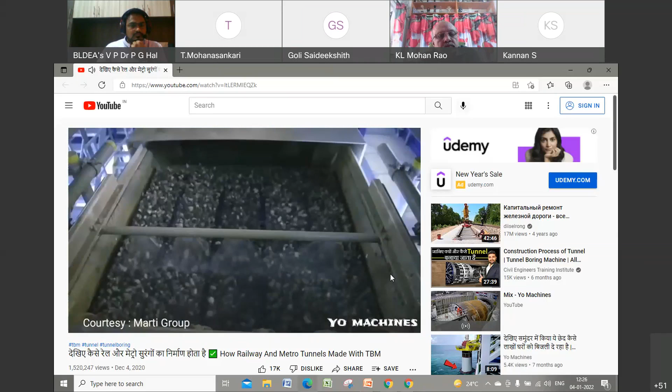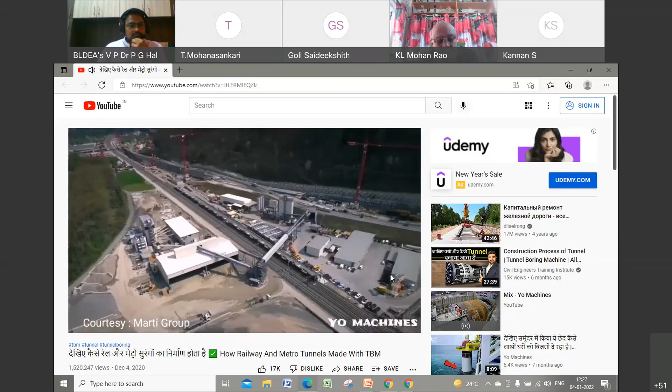इन मटेरियल्स में छोटे-छोटे कंकड़ के हिस्सों को कंक्रीट बनाने में इस्तेमाल कर लिया जाता है और बाकी वेस्ट मटेरियल्स को साइट से दूर किसी जगह पर जमा कर लिया जाता है, जिसे बाद में लैंडफिल के रूप में इस्तेमाल किया जा सकता है। देखिए क्या बढ़िया सिस्टम है। वेस्ट प्लांट से कंकड़ों को कन्वेयर बेल्ट्स का इस्तेमाल करके दोबारा सुरंग बनाने वाली जगह पर भेज दिया जाता है।

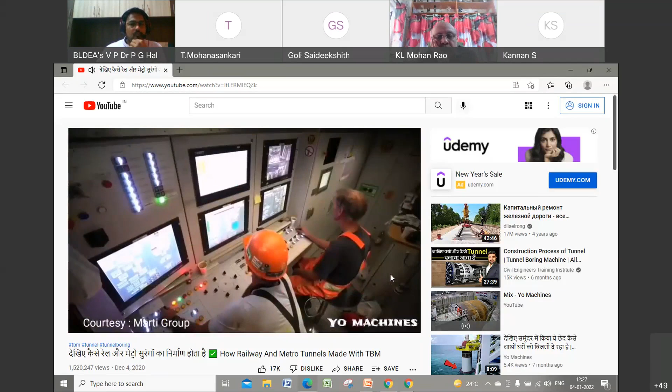3 किलोमीटर लंबे इस सुरंग के रास्ते में 2 आपातकाल एग्जिट्स दिए गए हैं। सुरंग में किसी भी तरह की दुर्घटना होने पर इन्हीं रास्तों से लोगों को बाहर निकाला जा सकता है। टीबीएम के अंदर ही मशीन्स को चलाने के लिए कंट्रोल रूम बने होते हैं, जिन्हें बहुत ही एक्सपीरियंस्ड इंजीनियर संभालते हैं। टीबीएम की स्पीड से लेकर सुरंग की खुदाई जैसी हर जानकारी कंट्रोल रूम में मौजूद होती है।

टीबीएम के अंदर लगे हाइड्रोलिक्स और सेंसर से बने सिस्टम का प्रयोग करके सुरंग की दीवार को कंक्रीट से तैयार किया जाता है। टीबीएम एक एक करके कंक्रीट की मोटी शीट्स को सुरंग की दीवारों पर फिक्स कर देती है।

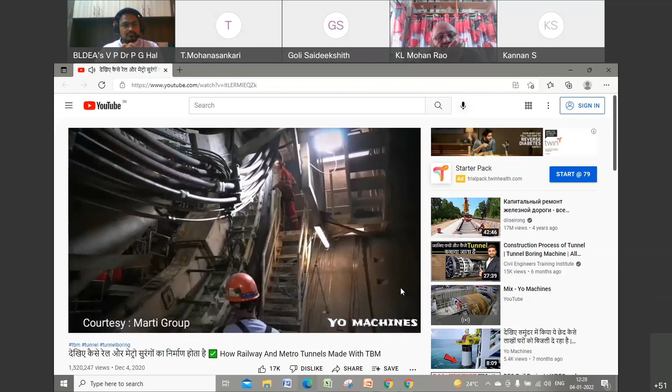ये पूरा कमाल टीबीएम में लगे हुए हाइड्रोलिक्स की वजह से काफी आसान हो जाता है, जिसकी वजह से टीबीएम के अंदर बहुत ही कम वर्कर्स की जरूरत होती है। कंक्रीट के इन हिस्सों को सुरंग की दीवार के साथ साथ आपस में भी लॉक कर लिया जाता है।

Can you hear me, sir? Yes sir. Sir, it was a very informative session. Thank you very much, sir. Sir, should I end or do you want to continue something?

Yeah, so whatever I explained for nearly one hour, this man has finished in eight minutes. He has shown you all the process. I wanted you to understand what is a tunnel, what is a lining, how it is placed, how the tunneling TBM is assembled, how it is removed, and how the waste material is taken out. I think whatever I talked about has been explained in that eight minute video, and I am sure you would have enjoyed listening about tunneling and also started realigning yourself towards tunneling engineering.

Now it is time for the third and fourth year students to find out what to do after engineering. Can we become tunnel engineers? How to go and where to go? How to apply? If you start working towards that, this will be the most important infrastructure project carried out throughout the world. And tunnel engineers, as I told you, are not available at present.

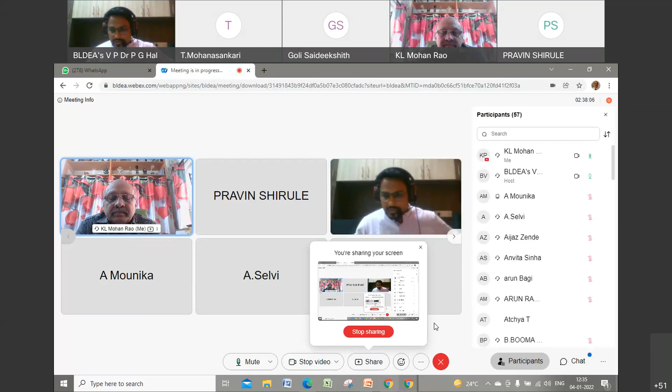So there's one question in the chat box. The machines which were brought from Japan, how long did it take to procure? See, procuring is a process. First the global tenders, all those things. And most of them, excepting one, we had procured second-hand machines from Japan. The vendors themselves will provide all this information. They will identify, because they are the people who are going to work there.

So all this process takes nearly 1 or 2 years, and transportation of this machine from Chennai to Bangalore itself took 6 months, because it was such a huge thing. We had to move only during the night hours. So procuring, installation, and making it work takes nearly 6 to 8 months.